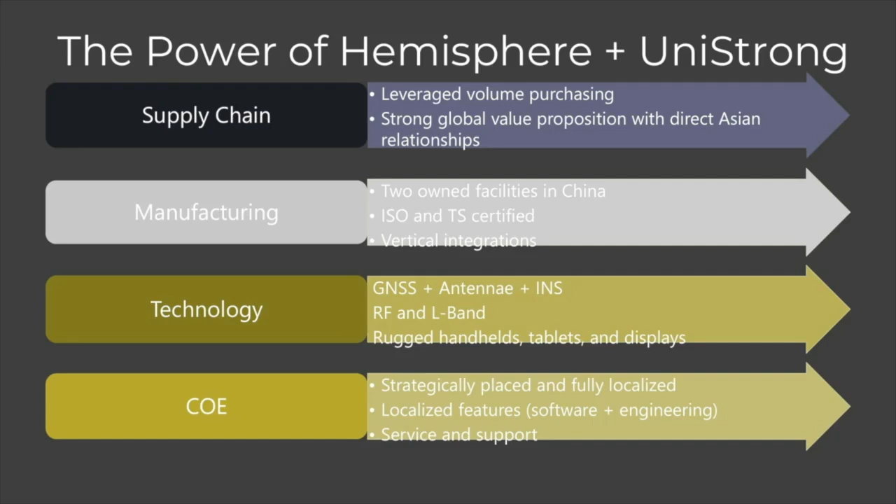Just touching a little bit on the power of Hemisphere and Unistrong. All of our products are developed in the US based on our very rigid quality standards, but at the same time, we have the production facilities located in China. We just recently opened a new contract manufacturing facility in Zhengzhou in cooperation with a company called Foxconn. All the development, design, and production, through to the finished good, is all in one hand, which is very seldom. We are only one of three companies. We cover the ASIC design, the GNSS algorithms, the antenna design, the software design, from start to the finished good. It's all in one hand, and we control the entire process.

So let's talk about GradeMetrix excavator site controlling guidance. GradeMetrix excavator is packed with industry-leading technology. It's very easy to use, as you will see later on, and is delivered at a very affordable price. The system can be installed and calibrated in less than 1 day, including all your buckets. From mini excavators all the way up to large civil or mining machinery, all are covered by either the mastless VR500 all-in-one antenna or the VR1000 dual antenna solution.

The GradeMetrix system fits straight into existing site infrastructure where you already have systems in place, with all the same formats and base station corrections. It also offers a best-in-class 3-year warranty on all expensive components for peace of mind. Increase efficiency, and your ROI could be as short as a matter of months. What we also have in mind is the 2.5D market. We want to enable customers to use GNSS at every site.

So this embedded function in Grademetrix allows you to use the GNSS guidance technology for a vast array of simple, useful applications here, without the need for complex 3D files from survey. Using just a couple of keystrokes, you can easily create simple layers, single or dual slopes, ramps, and even roads. And Ronald will show that in part of his presentation later on.

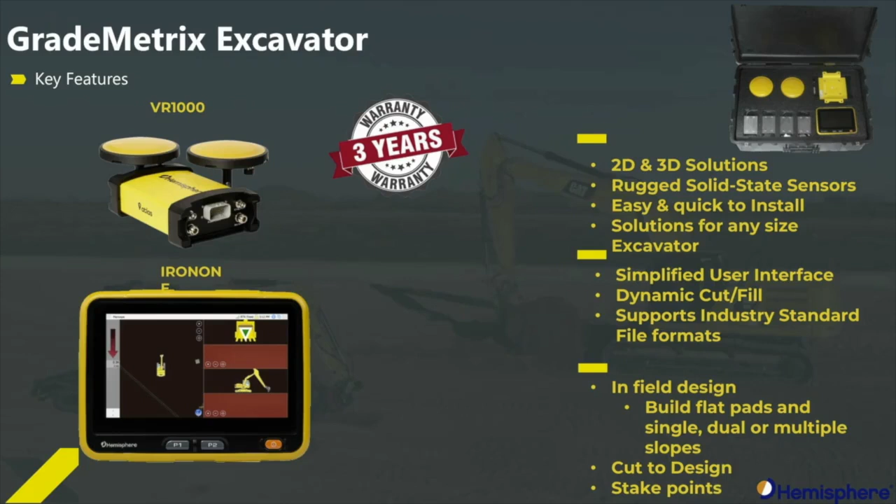What is embedded? We use probably the most modern RTK engine available in the market. Our latest multi-frequency multi-GNSS solution uses every available satellite in the sky as a standard feature and not as an option. It offers full satellite constellation for maximum accuracy and maximum coverage in difficult environments. Beidou, Galileo, and QZSS are all within our standard solution. Nothing to pay for, not just GPS and GLONASS. Therefore, it will reduce the downtime of your GNSS machine control fix significantly, and as a result, also expensive machine downtime.

Especially in difficult environments like open pit mines, where we will later show a case study, or in urban canyons, you will see a major difference if you have more satellites available. Also, using our own proprietary Atlas L-band signal, you will get the ARTK feature as a standard setup in your hardware configuration. So if you lose your RTK fix using a base station or NTRIP data, our Atlas L-band signal will help you keep the RTK accuracy for at least 10 to 15 minutes.

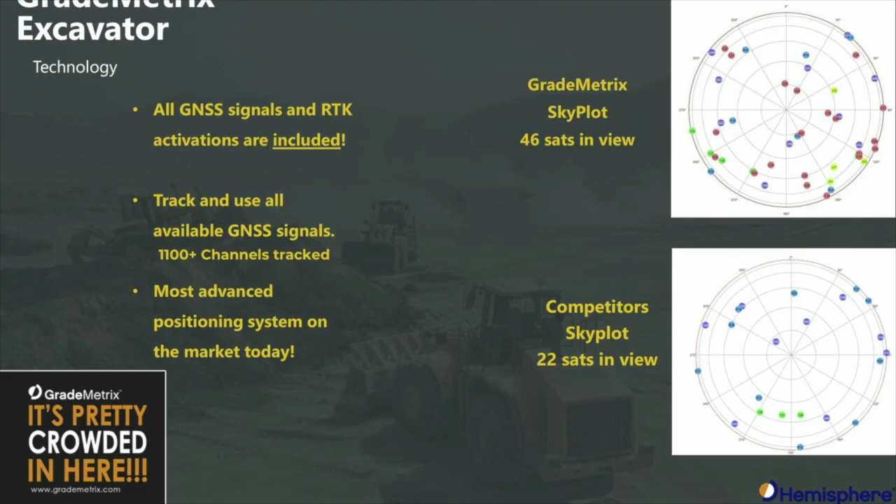So in order to help you plan your jobs, Hemisphere also offers a GNSS mission planning tool. Using the tool, you can enter your job site location, the time of day you want to work, and possible obstacles in your way. And as a result, you will see a detailed plan of satellites available. That is something you can find on our website.

So talking about the solutions that we offer on the machines. This excavator solution is powered by hardware components that have undergone extensive shock, vibration, and environmental testing to stand up to the harshest job site conditions. The solution that we offer for compact excavators comes with an IronOne PC, which you see on the bottom left, a VR500 vector antenna, and gyro-stabilized angle sensors.

So the Iron 1 is where the heartbeat of the system lives and all information comes together. It's embedded in a very ruggedized IP67 rated housing, featuring an 8-inch daylight visible touch user interface. It's made to withstand the harshest environmental conditions on a normal job site. The Iron 1 runs a Windows 10 operating system, and it offers full connectivity using Wi-Fi, Ethernet, and a GSM modem for worldwide usage. The combination of Windows 10 and an activated SIM data card inside the Iron 1 also allows your local distributor or Hemisphere support team to dial in to your system and offer online remote support and data transfer. As with all other major components of the system, it comes with a 3-year warranty.

The Vector VR500 is a unique and the world's only full dual GNSS positioning and heading device featuring one of the most modern RTK engine solutions. It embeds 2 antennas with a 50 centimeter baseline and an unrivaled heading accuracy of 0.2 degrees for this short baseline. To enable the simplest installation, a 400 megahertz radio modem and the UHF antenna are both built into the housing. It offers seamless connectivity with Ethernet, Wi-Fi, Bluetooth, CAN, serial, and a sophisticated web user interface.

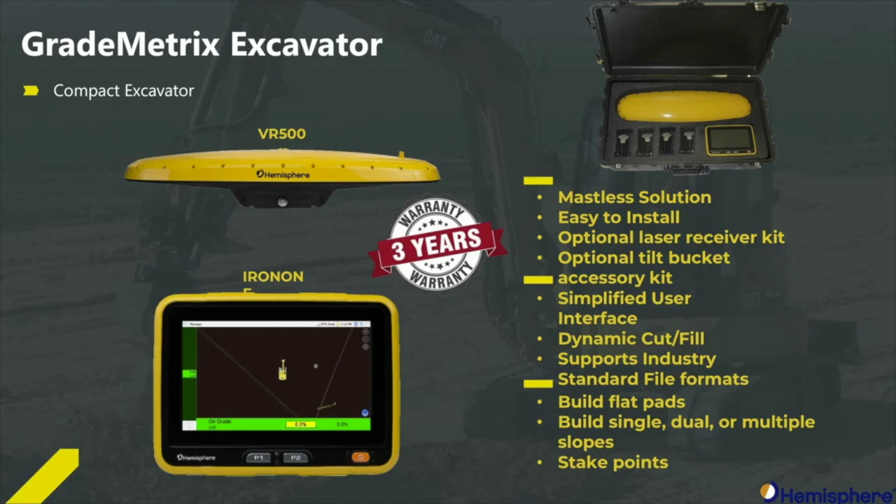The large excavator solution comes with an Iron 1 PC, a VR1000 heading receiver antenna, and gyro-stabilized angle sensors. The Vector VR1000 is one of the world's leading dual antenna GNSS position and heading receivers. It uses 2 A46 antennas. It features a heading accuracy of 0.1 degree at a 2-meter baseline on the back of your excavator. To enable simple installation, a 400 megahertz radio modem is built into the housing. It offers seamless connectivity with Ethernet, Wi-Fi, Bluetooth, CAN, serial, and a sophisticated web UI. The VR1000 was developed against the highest automotive standards, as we did that together with a big OEM as an OEM fit.

Plus, we had to comply to additional requirements. Each single axis of this unit is tested 32 hours for random vibration, followed by an aging section with temperatures raising and lowering between plus and minus 40 degrees Celsius. This is again followed by a 32-hour random vibration test.

You can basically install this unit anywhere in the machine engine compartment, steel on steel, with no need of vibration supportive material. Additionally, we use gyro-stabilized sensor technology, so you have no lag time in response, meaning highest accuracy and clear visibility for the operator, even on long-reach machines. Even if broken due to a working environment, we keep cost for wear and tear as low as they are off-the-shelf industry components.

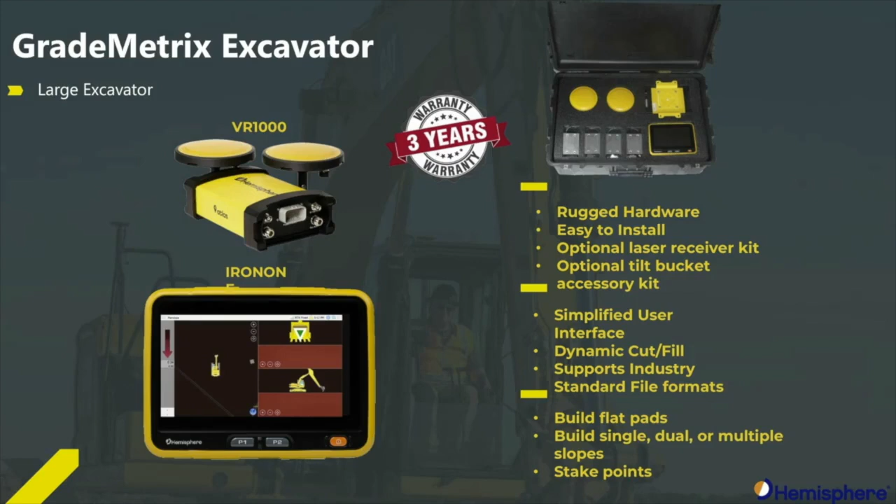Cost savings effective immediately. As we have seen before, this system technology is based on few components and 4 cables only. So you can already start saving cost before even using it. The installation time required by your distributor only takes half a day and the acquired equipment is easily interchanged between machine fleets.

Here is one example of why using Grademetrix on your excavator. Imagine a batter is overcut by 0.5 meter over 500 meter length. The overcut would total 2,500 cubic meters. Additional excavator time could be as much as 25 hours, plus 166 truckloads would be needed at 15 cubic meters per truck. So the total cost would be more than the cost of the guidance system to prevent it.

We used to hear from customer testimonials or advertising that the productivity technology for machines is providing customers with 20 to 40% plus productivity gains. Fuel consumption difference between the 2 methods, as an example, represents about 30% savings. Time is another part of your saving equation, as you will improve the time to finish a job at least by the same percentage. This is represented by less passes required to get on grade, and we shouldn't forget that the closer to final grade you are on earth-moving operations, the faster the time for grading will be.

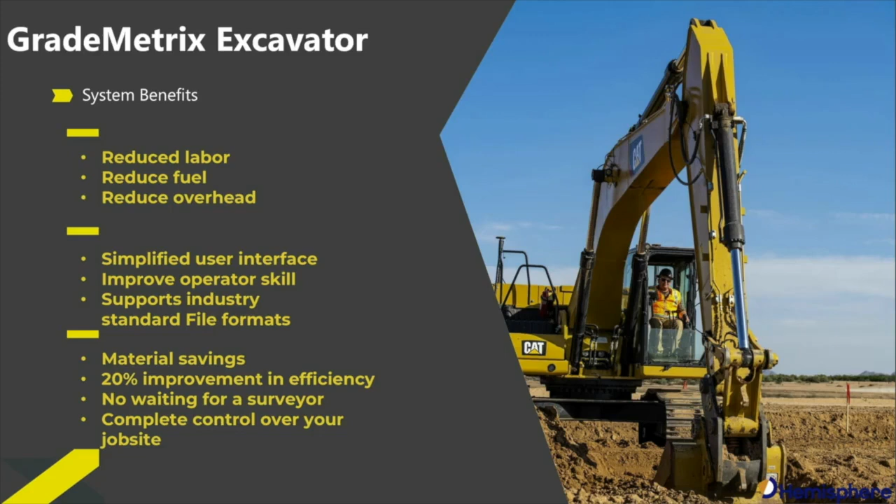So case study 1, which was given to us by a company called Red Rock in Australia, that's exactly what the image is about. We talk about how much there is to gain from utilizing high-precision GPS systems on machines in mining. In this case, we were fortunate to receive some great feedback on 2 Hemisphere high-precision digger systems fitted to some large mining excavators.

The shading in the wall that you can see at the bottom represents dig compliance. Green is good. So previously a site may revisit a section of batter 2 to 3 times to get it right, and not always successfully, leaving valuable product behind. In only 1 week and a single pass, they got it on the money. Outstanding effort from the operators, and good to receive such great feedback from our valued client.

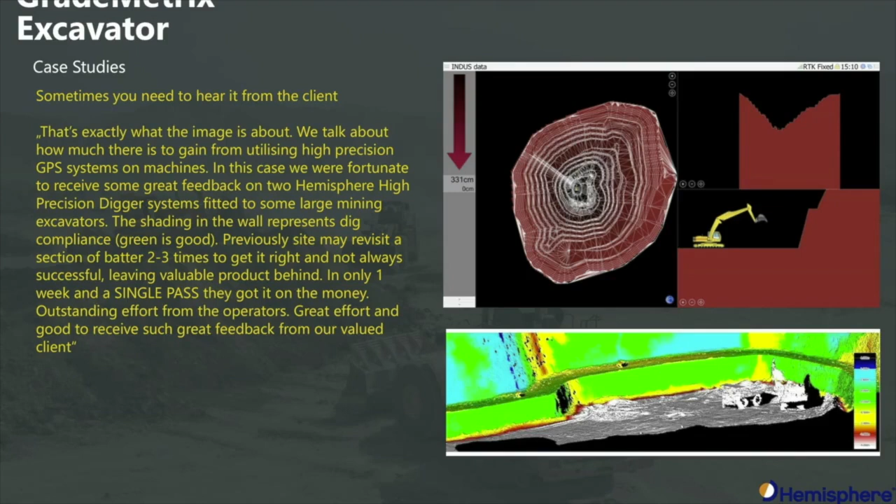So on the top of this screen, you can see the actual digital terrain model of that mine, and on the bottom, they made some checks afterwards on how good the excavation was done. And as you can see, and as mentioned in the text, it's right first time, no more expensive additional excavating is required.

The second one shows a case study which is more for a standard construction site. So this is about rainwater retention basins, and in the past, it seems that the job size played a very important role in the acceptance of guidance technologies. But what we want to achieve with the lower investment and price that we have is that customers basically can use it on a daily basis.

So in this particular case, the surveyor hasn't even staked out the basin, just only a couple of control points where the excavator driver could check the accuracy of his system, and the rest was simply designed by him and the 3D machine control system.

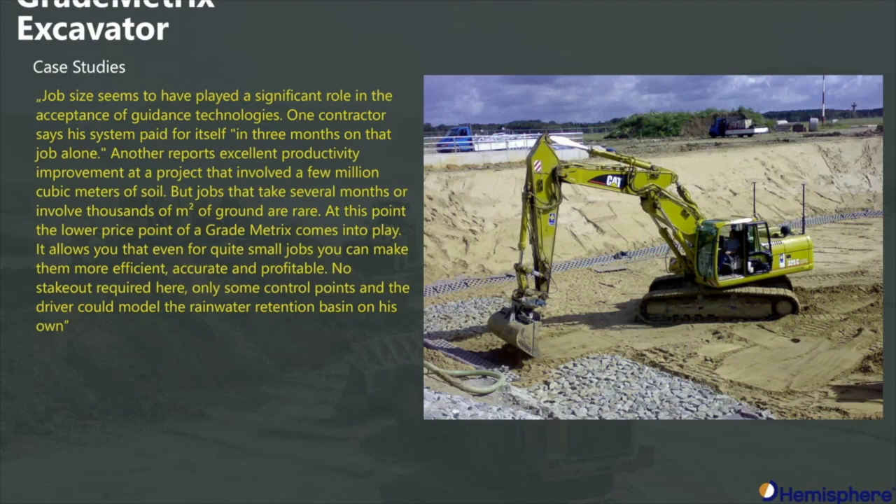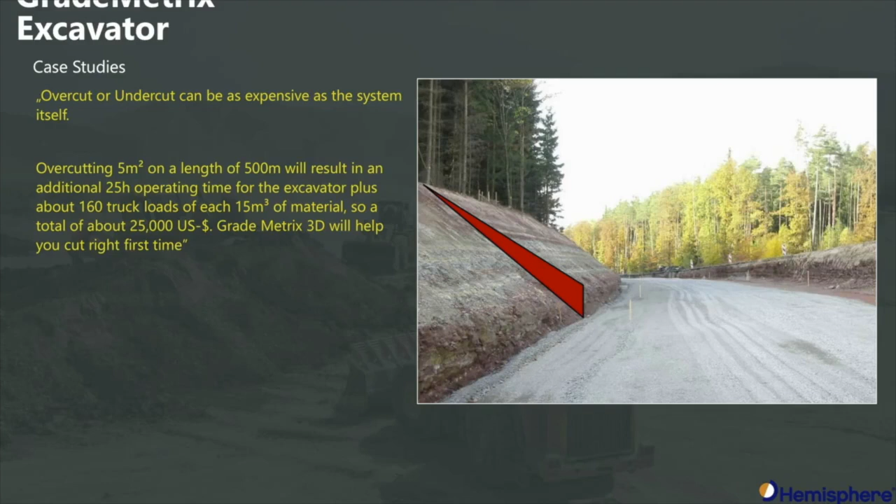And the last one, I mentioned that in the text before, shows how expensive an over or undercut can be. Again, as I said, just overcutting by 5 square meters on a length of 500 meters will result in extra cost of $25,000, which is almost the price of the entire system.

And now I will hand over to my colleague Ronald. He will share his screen and will run you through the presentation of the software.

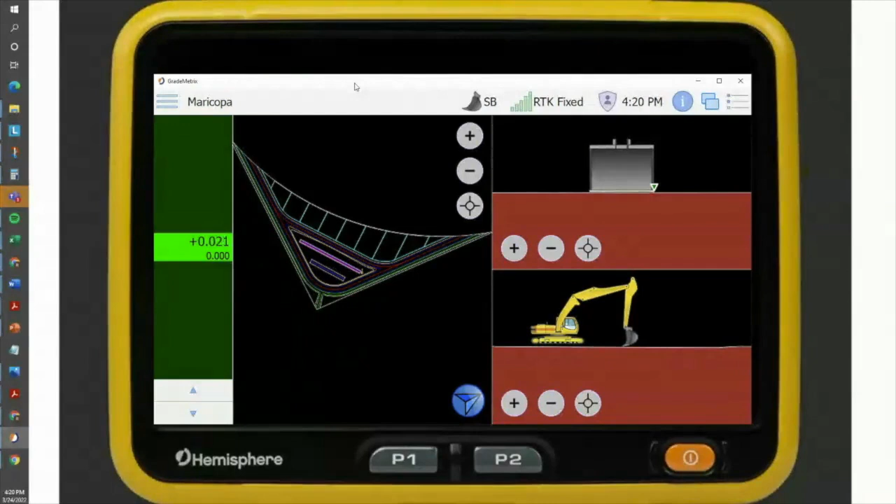So once the system has loaded the surface, line work, and localization, and the GNSS receiver has a fixed position, you're ready to start work. Currently, we support many ways the GradeMetrix can display cut and fill information, critical for grading operations. These different views are available in the upper right corner here.

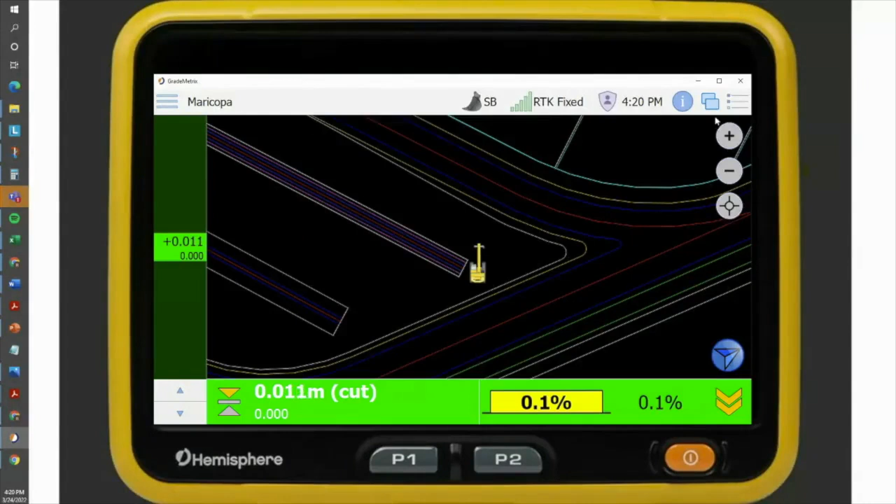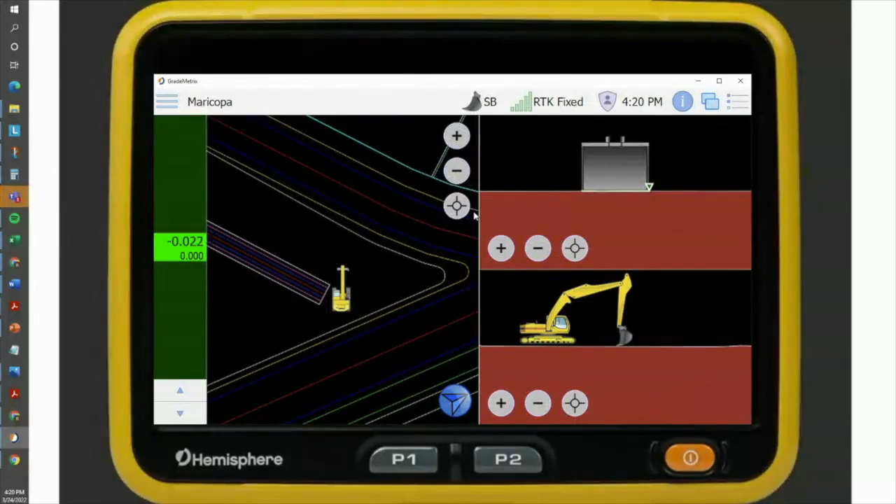Among these views, we have plan section cut and fill, big cut and fill, plan section and profile, plan and section, profile and section, plan only, section only, dual excavator. So I'm going to come back to plan section and profile, which in my opinion is the most common, the most useful one. This menu will allow the operator to select from this list of predefined views.

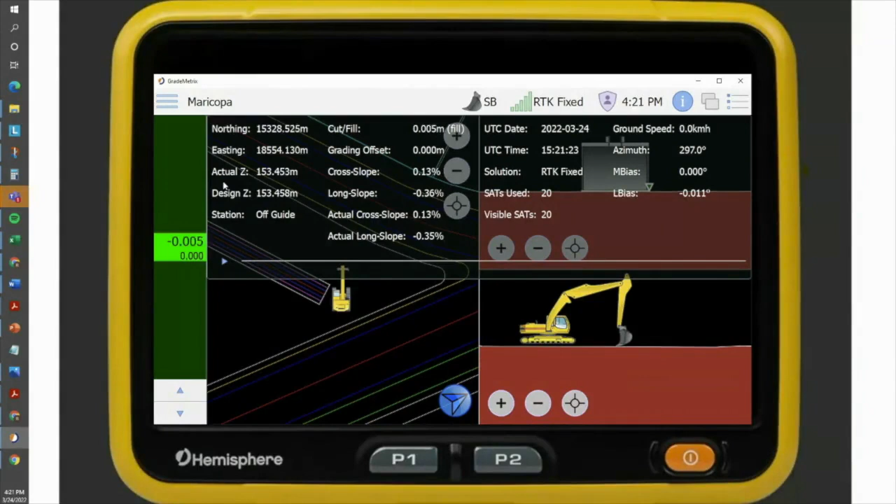So the section view shows the bucket as the operator is seated in the cab and seeing the bucket out of the front window. If the operator wants to see additional information, just click on the information icon, and it will display information related to the bucket and machine position. As you can see here, this north, east and elevation actually apply to the focus point or the control point of the bucket. In this case, the control point is indicated by this small triangle over here.

If you want to change the control point to the other side, you just need to press and hold over the bucket, and then you can change this to the left side or maybe to the center. I will change it to the left as an example. Okay, now the information here should have changed according to the change of the focus point.

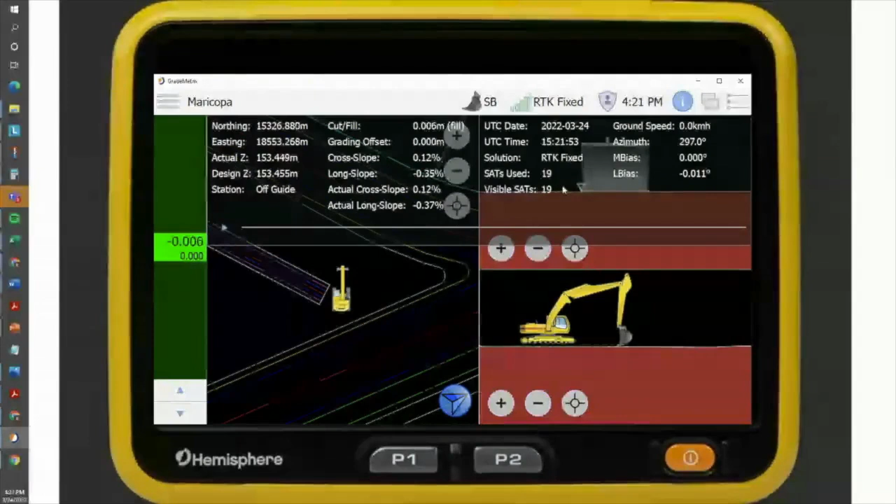All right, the information shown here can also be set to the user preferences. To change the information available in the information icon, you just need to open the menu, and then go to the gear. And here in the info summary is all the information available. You can tick or untick, to show just the information you are interested in.

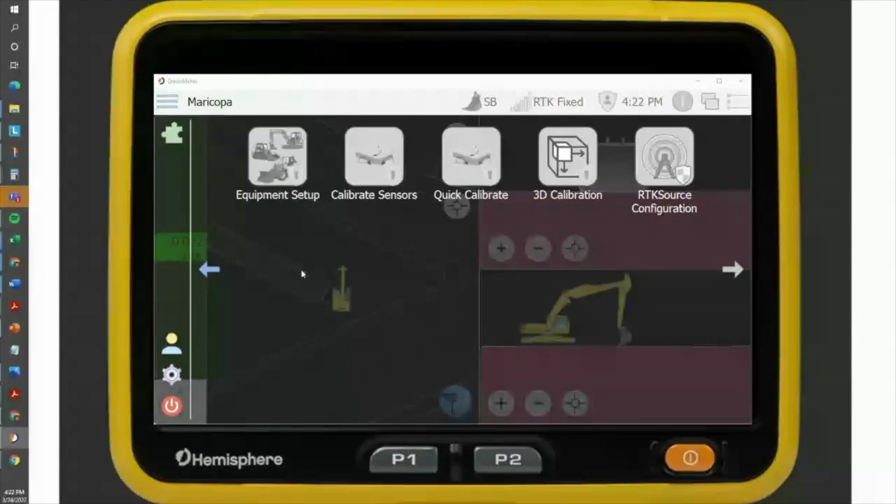Okay, there is another interesting thing here. As you can see, some of the options in the main menu are grayed out. So options related to opening new jobs, modifying jobs, deleting, and setup related to equipment setup, calibration, or articulators are grayed out and not accessible for users, just to protect information. If you want to have access to all the options, you just need to come here and change to administrator mode. Of course, the access to administrator mode can be protected by a password.

Okay, I'm going to get back to user. The GradeMetrix always starts in user mode when you start the system. Additional information can be found here in the grade and monitor view. Information available here is usually used for verification or diagnostic purposes. Among them, you have the VR1000 or the receiver information. In this case, it's a VR1000, but it could be a VR500.

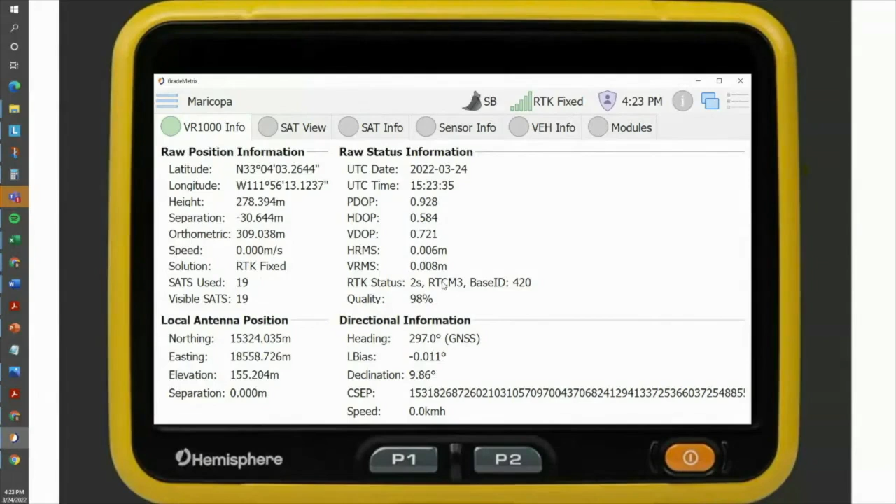So we have raw position information from the primary antenna of the system. We can also have information about the solution we are using: if we have RTK fixed, how many satellites we are using, how many satellites are visible, the RTK status, the messages being used, and the distance to the base station. Then we have the sky plot, satellite information, relevant sensor information, and vehicle information.

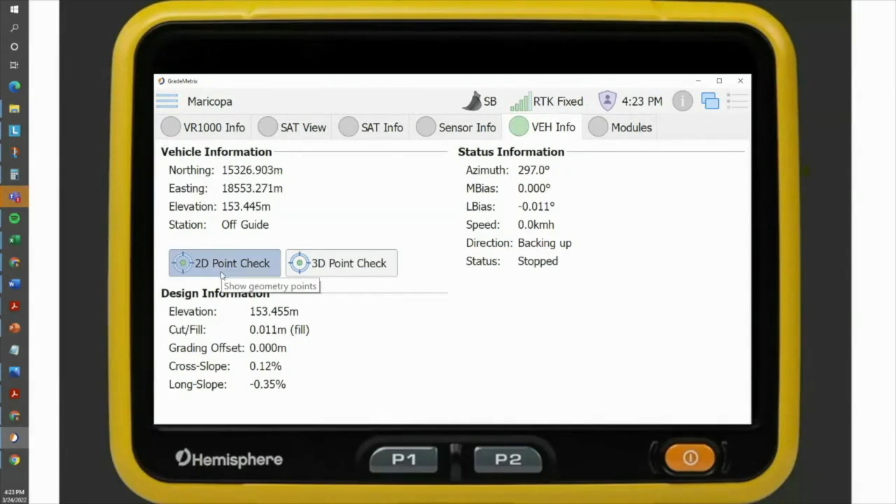Here again, we have the local position of the control point, the focus point of the bucket, and the surface exactly below it. We also have access to the 2D point check. These distances are the distances calculated by the system from the boom stick, for example, to the bucket pin or to the teeth. This is designed to check if your calibration in 2D is properly done.

Another thing available here is the 3D checkpoints. Here you have, again, the position of the right, left, and center teeth of the bucket. If you use a rover and measure the points, and the rover is connected to the same correction source as the machine, you can compare this measurement and ensure that your 3D calibration is correctly done.

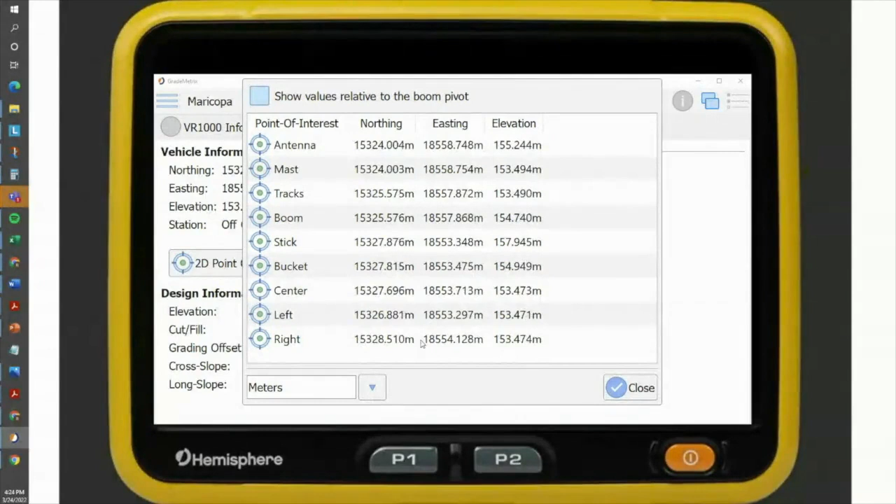All right, so let's move on. When a surface is created for a job, it's usually showing the finish grade, or the elevation of the last layer that job requires. The operator will have to adjust the offset, or offset the thickness of that layer, to get the proper cut/fill indication to a subgrade.

So Grademetrix can change the target elevation. This can be done using different methods. As you can see here, my bucket is touching the surface, and it's almost on grade. I can change my offset to a lower elevation, to a new target elevation, just pressing these arrows here. I can go down, I can go up. In this case, I'm lowering my target elevation by 10 centimeters, and this dotted line is showing my new target elevation.

Okay, I can also enter a specific amount of target by pressing and holding over the light bar, and this menu will pop up. Here I can enter a specific amount of offset. I will enter something like minus 0.6 meters. I can also save this new value in a preset, so I need to press and hold. I can also change how big I want the steps to be every time I press the arrows on the side. I will change it to 0.2, just for demonstration purposes.

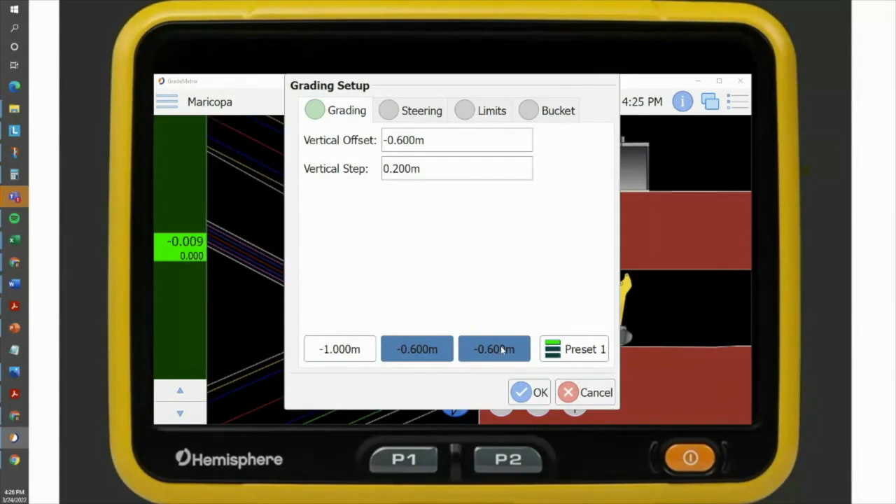Now, if I press 0.6, this amount of offset was applied. And you can see again that the red dotted line is displaying my new target elevation. Now on top of that, every time I press the up or down arrows, the amount of offset I'm applying is now 20 centimeters, not 10 anymore. Okay, so we discovered how we can adjust the offset and how to move the surface to a new target elevation to make space for new layers.

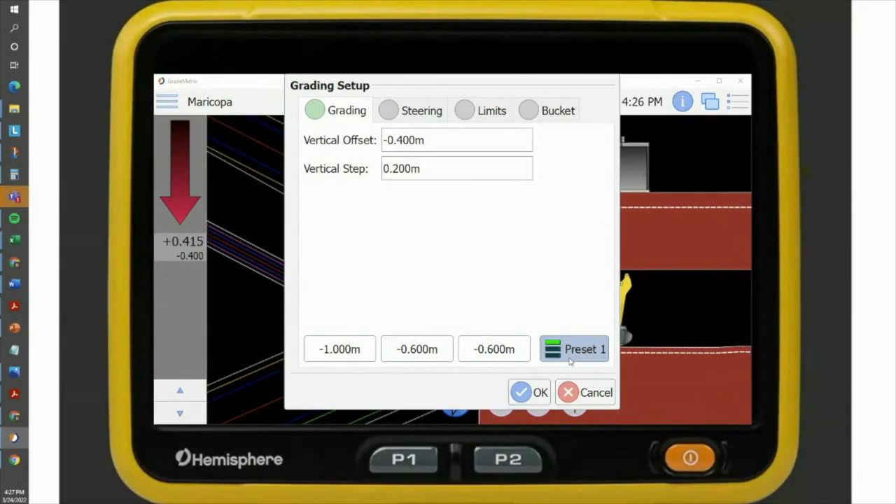This is another thing that I almost forgot: we can save up to 9 different presets, just for the speed of the operation. I'm going to keep my offset at 0 now. So now that we know how to use GradeMetrix for a previously loaded job, we will learn how to create a job. To create a new job, we need to come here. As you can see, the new job option is grayed out, so I need to change to administrator mode, and then I can start a new one.

The first thing the system is going to ask is to give a name to the job. I'm going to leave it as new job. We can also add a description to the new job, and we can also add notes. Then I will press next. The first file the system will ask for is the localization file. It could be a full localization file in a log format, or known points that we can shoot using a rover and do the localization on board. We can also use localization files from Trimble or Topcon.

In this case, I'm going to use the same project that you saw before, this Maricopa. I'm going to click over here and search for my Maricopa project. In this case it's saved in this design emulator. All this information is on my computer, but of course on a real job site it would be on the USB, and the new drive would be listed in this space. I'm going to open my Maricopa folder, and here I have my localization file, and I'm going to open this one.

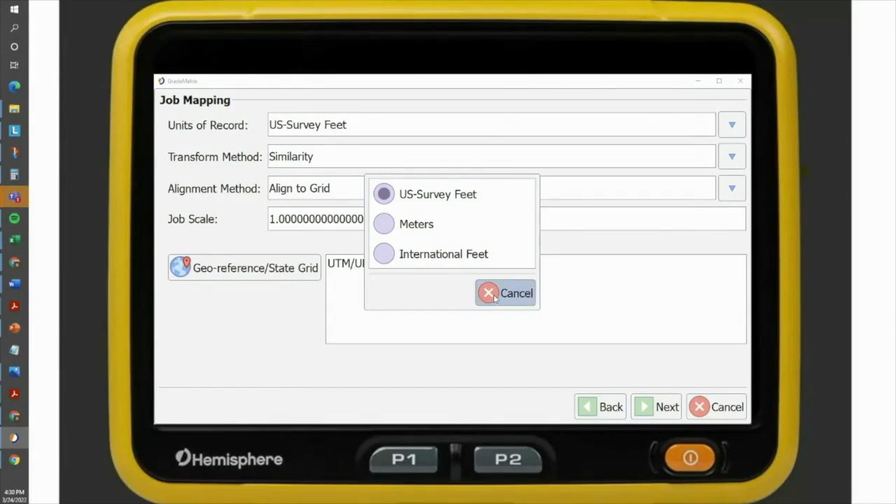Now, when I have this selected, I'm going to press next. So then there are the units of record. In this case, it could be in feet, it could be in meters. I'm going to keep it in feet, given that this project was made in the US and was made in this specific unit.

This is a place where you can select your coordinate systems. If you need to use a specific predefined projection, you have a list of them already loaded on GradeMetrix. If your specific projection for any reason is not listed here, you can always come to custom projection and load your own.

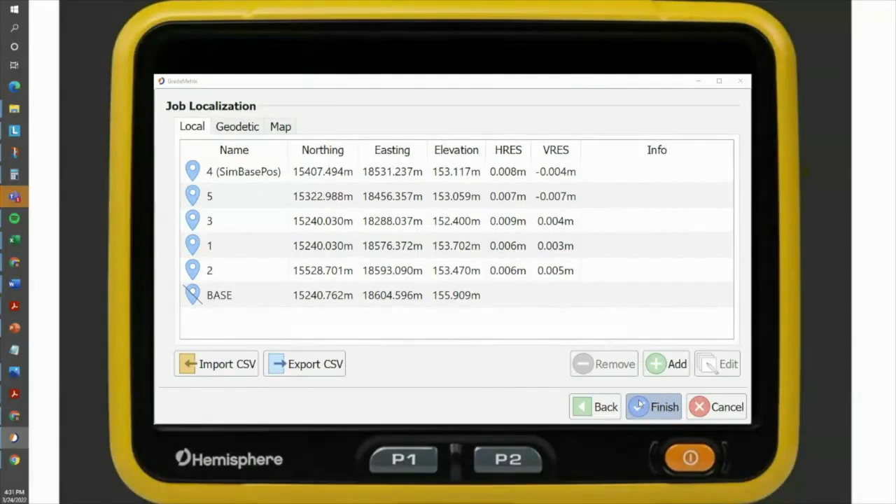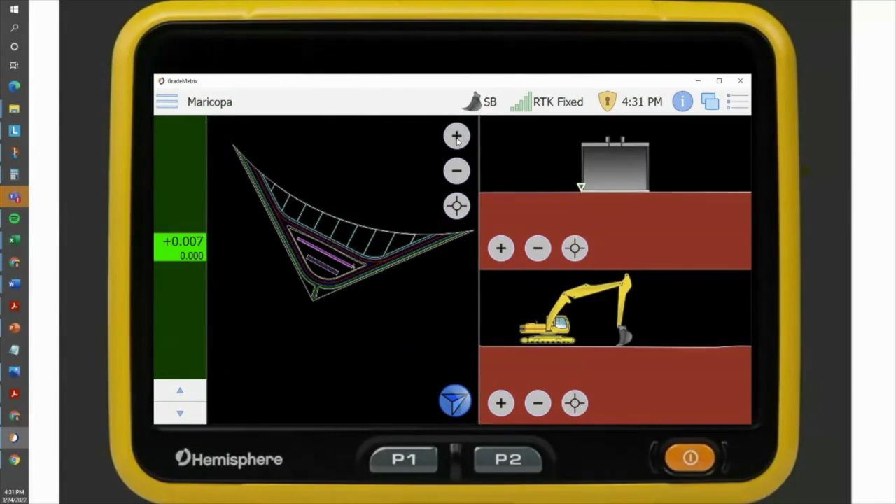Okay? Then you press next, and I'm going to have a list of the control points or localization points on this specific project that I selected and loaded. I'm not going to press finish now because I already have Maricopa loaded, and it's just going to consume time while it loads. So I'm going to cancel this one. But this is the project at the end; as you can see here, the name is the same. I can zoom out, zoom in, and if I press cursor, it will focus on me.

Okay, another thing on top of that: there will be cases where modifications need to be done to the specific job or an entire new project needs to be done on site. We have included tools for that purpose. We call it field design. Field design does not require a localization file, line work, or DTM. It just needs RTK fix.

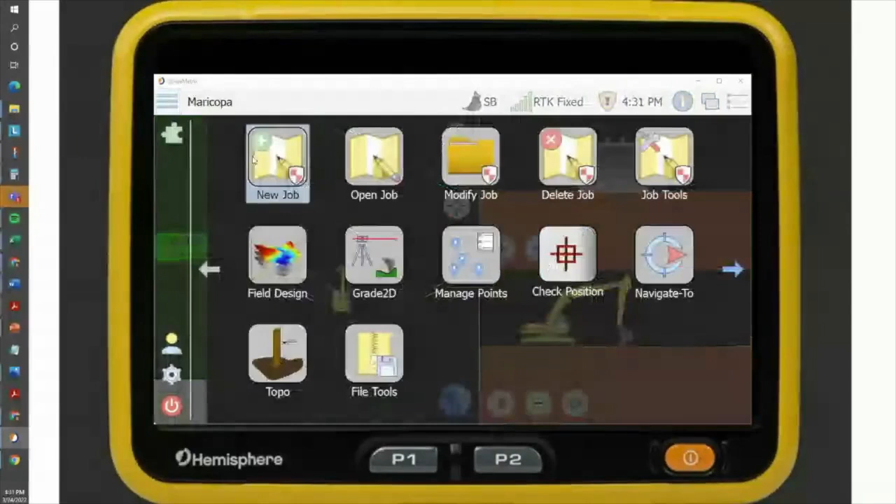For that, I'm going to start a new job, and I will keep it clean until the end. So I'm going to clean and not load anything. I'm going to start from scratch. So this is what we call 2.5D. In this case, you need to go to field design. And here we have 4 different options. We have flat pad, sloped pad, ramp, point surface, and an option to clear the last design that I made.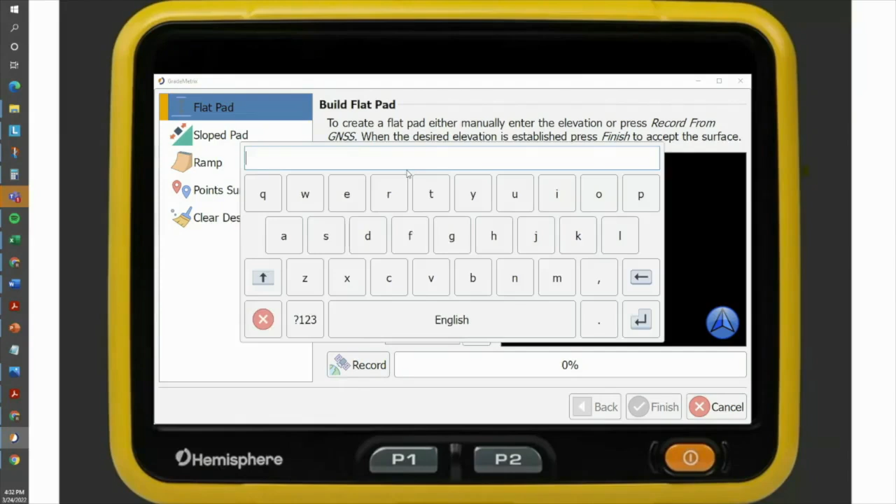To create a flat pad, I'm going to start with this most simple one. You just need to give the flat pad a name. I will call it flat 1. Then you need to place the bucket over the reference you're going to use to create that flat pad. And you need to indicate what side of the bucket you want to use, left, right, or center. I'm going to leave it in left for this. And you need to place the bucket in the right position and press record.

You can also edit the height or the elevation if you want. I'm going to change it to 100 meters. And press finish. As you can see, now I have a new surface created by this specific design that I just made. If I again adjust my offset, the offset is going to be applied to the same surface.

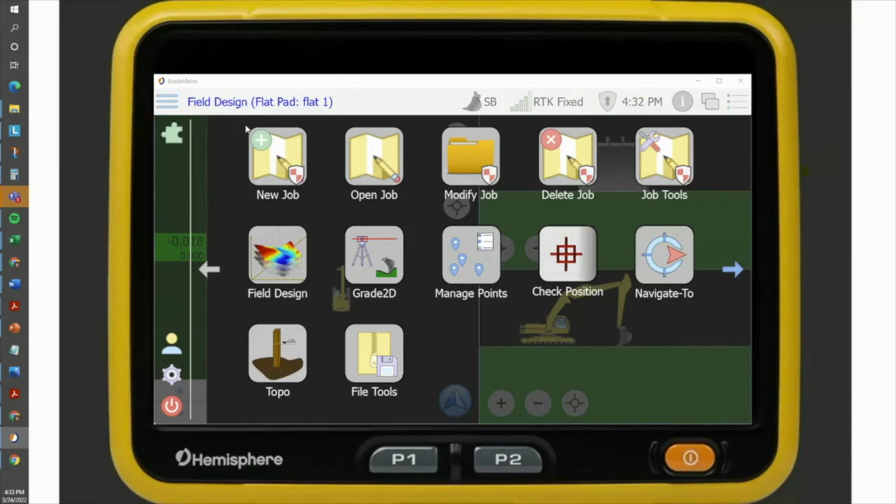Okay, let's move on to the next one. The first thing that I need to do is to clear the design that I've made. GradeMetrix is going to select the last one designed and ask me if I want to remove that one. I would say yes, I want to remove the flat pad. Now I'm going to create something a bit different, which is a sloped pad. In this case, again, I need to give a name. I'll call it sloped 1.

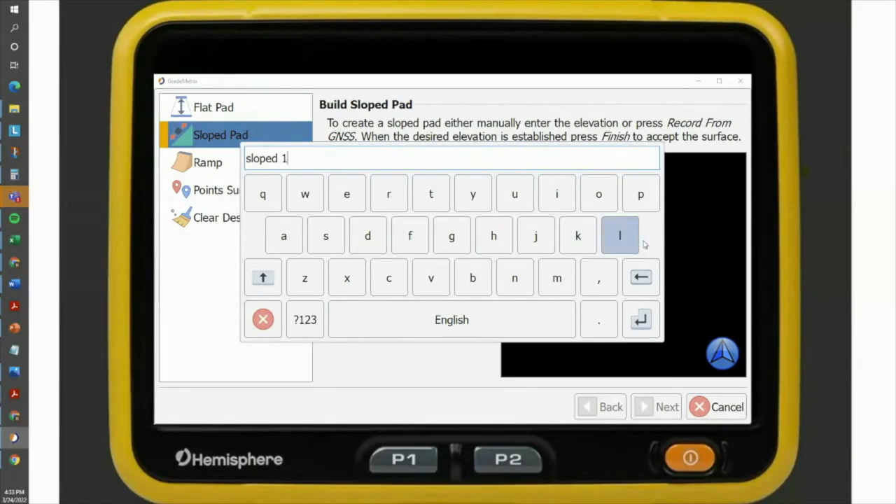And press next. Now I have to position the vehicle and the bucket again on the first reference I want to use to create the sloped pad, and press record. I can manually enter the north, east, and elevation in case I want to. I want to change this to 100, just for demo purposes again, and press next. Now I need to position the vehicle at the second point and measure that position. I move the machine, place the bucket over the second reference, and press record.

I can manually adjust the bearing, the distance, and the slope. I'm going to change the bearing to 100 degrees. The distance is going to be 80 meters long. And the slope, I'm going to fix it at 10%.

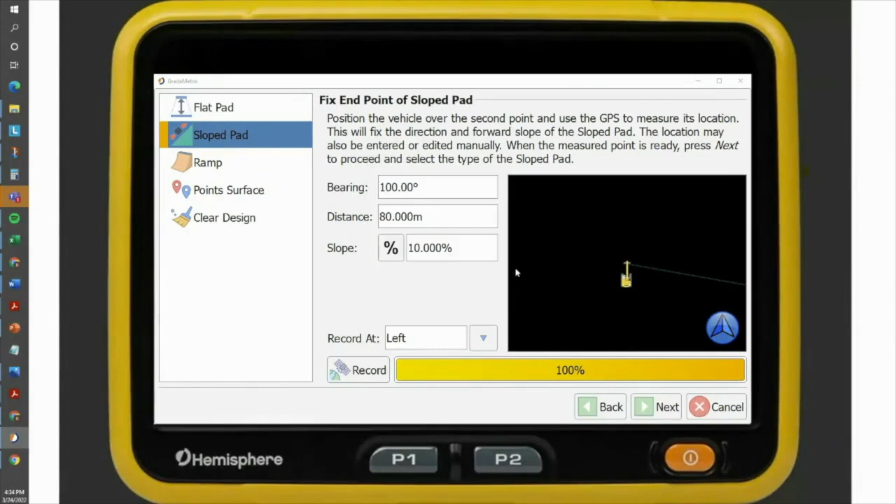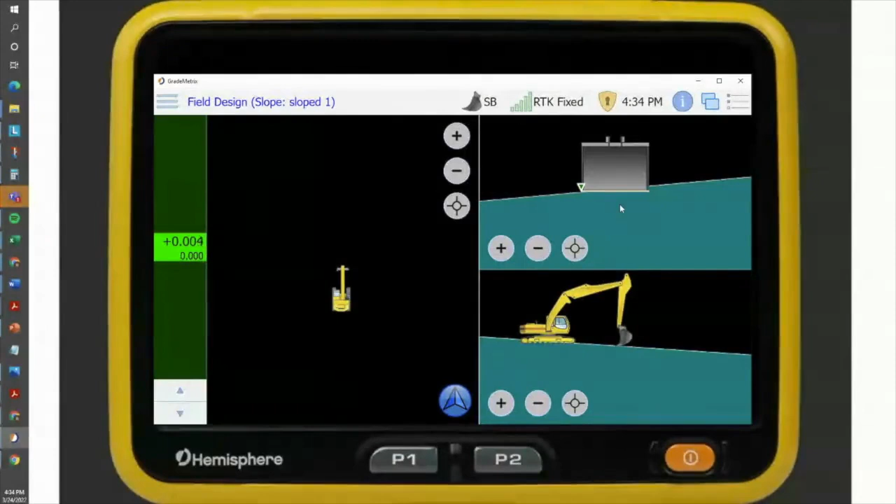Okay, and press next. Now I have the option to create an infinite sloped pad on each side of it, or I can give that sloped pad a specific width. In this case, I'm going to give a width at the center of 20 meters and a cross slope of 5%. And finish. And this is the result. I now have my sloped pad created. Okay, next I'm going to clean this design.

And I'm going to create a ramp. A ramp allows you to create a little more complex design, including main slope, length of the ramp, and the ramp profile creation. As an example, I will create something similar to a piece of road. First, I need to give a name again. I will call it ramp 1.

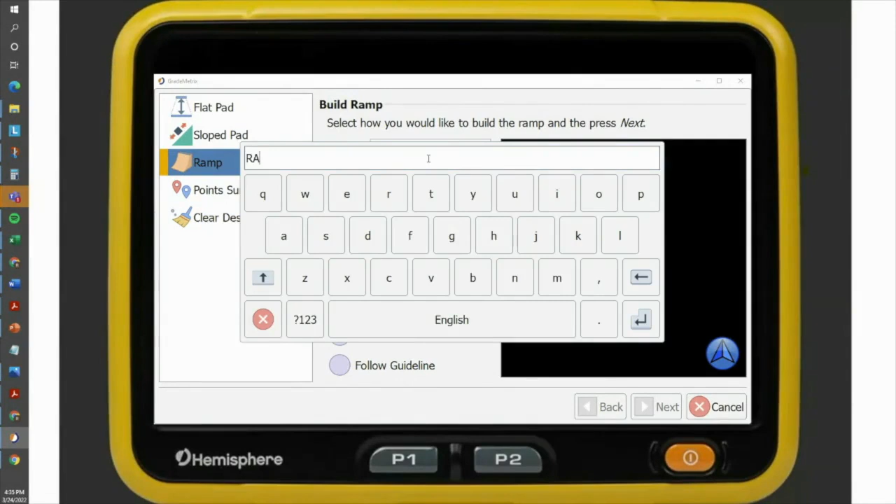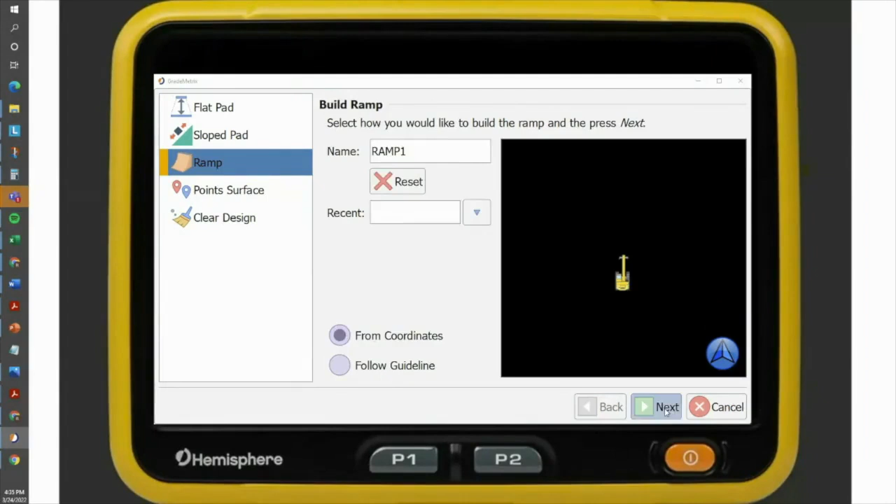In this case, I'm going to go from coordinates. Okay, again, I need to position the vehicle over the first reference that I want to use. Select what point of the bucket I want to use to measure that. I will give it left and press record. And next, now I have to fix the ramp direction and forward slope. Again, I move to the second position and repeat the process, hitting record again.

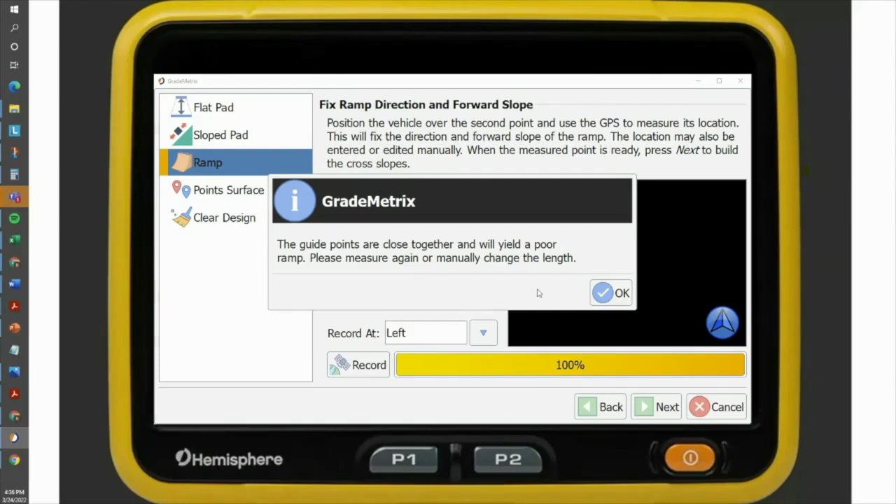It's telling me that my point is too close because, given that this is an emulator, I cannot move the machine while emulating in this space, so I'm going to enter some values manually. I'm going to leave the bearing as it is at the moment. I'm going to change the distance to 100 meters, and the main slope is going to be 5 degrees. Now it's time to create the profile of that ramp.

So the profile is built just by adding pieces of that profile to each side of the center line, which is indicated here. I can add a piece to the left, to the right, or both sides at the same time. In this case, to save time, I will go to both. The line width is going to be 5 meters to each side, and the cross slope is going to be minus 5%. And I will add these values to my ramp.

Now, I want to make like a curb on each side of this. So I'm going to try something a little bit different. The line width in this case is going to be 0, because I don't want any lateral displacement. I just want to go up a certain amount. I have different options: I have run and rise, I have rise and run, and I have delta elevation. I'm going to change this to delta elevation. I want to go up by 0.3 feet. And I'm going to add this. And here is my curb.

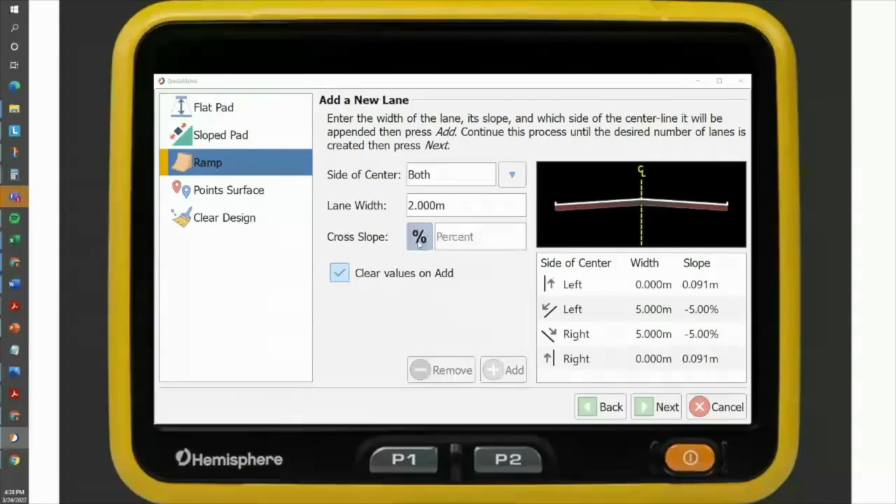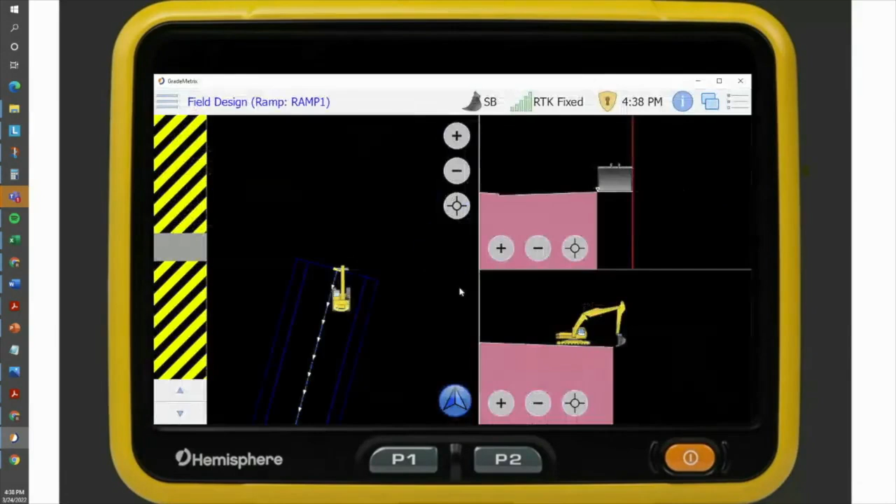Now I want to add the sidewalks. The line width is going to be 2, and I'm going to change this, just for demo purposes, to run and rise. In this case, I'm going to run 2 and rise 0.1. And I will add this. And here we are. If I press next, I have a plan view and a cross-section view of how this is going to look. If I press finish, now I have the ramp that I have created.

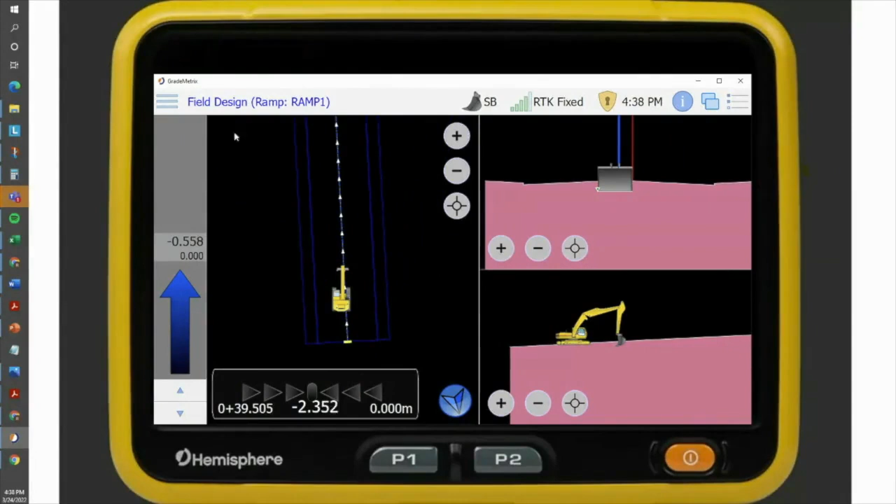Here I have my section view, my plan view, and also the system is giving me some guide to the center line, as you can see here. It also provides some kind of visual aid to allow me to follow the axis of that. Okay, the next and final, first I need to clear the design. I'm going to remove the ramp.

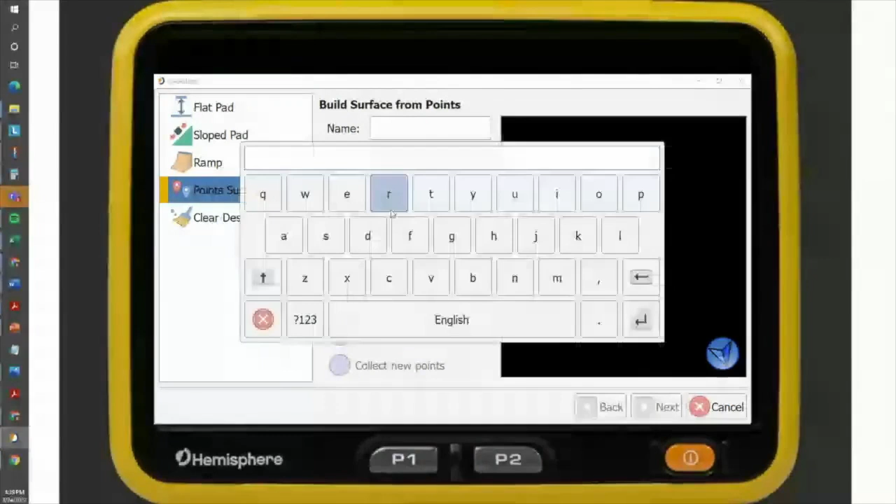And the last and final option for field design is to create a surface out of points. In this case, I think I have some points already saved in this folder, so I'm going to just give a name, and I will call it from topo. Okay, and I will press next. Now, I'm going to search for my topo files. I have some points already saved here. This is the file, the points I have created.

Oh, let me check something first. Sorry for this. Yeah, it's fine.

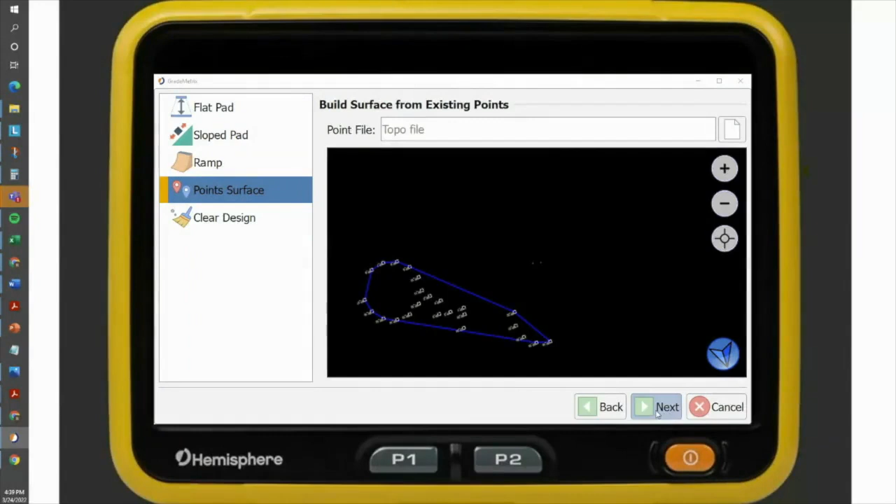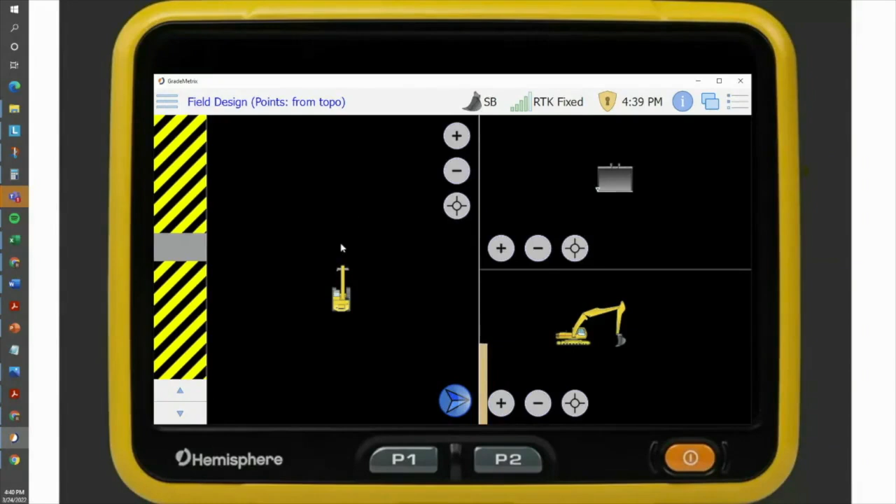I'm going to press next, and this is how it looks. These are just some random points that I recorded in a previous exercise. And I will press finish. If I turn the machine, usually it takes just a moment to load this. And here we are. It's not visible here because there is no line work in this design. So to make this visible, I just need to go to the main menu, click on the gear again, go into surfaces and show this as design.

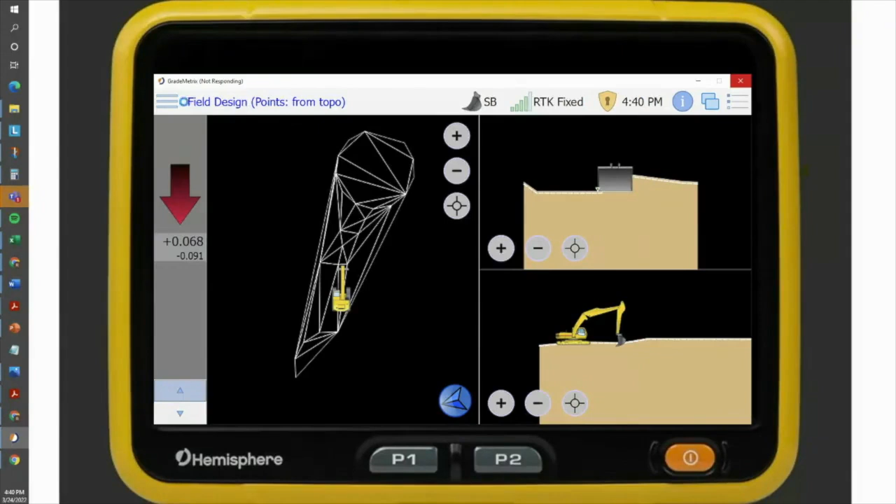And here we are. This is the design. As I say, don't pay too much attention to the design of it. It's just some random points that I have saved. Okay? And here we are. Again, if I apply the offset, it's going to be applied to the new surface. Okay, I'm going to clean this. Oops. So here we are. I'm going to clear the design.

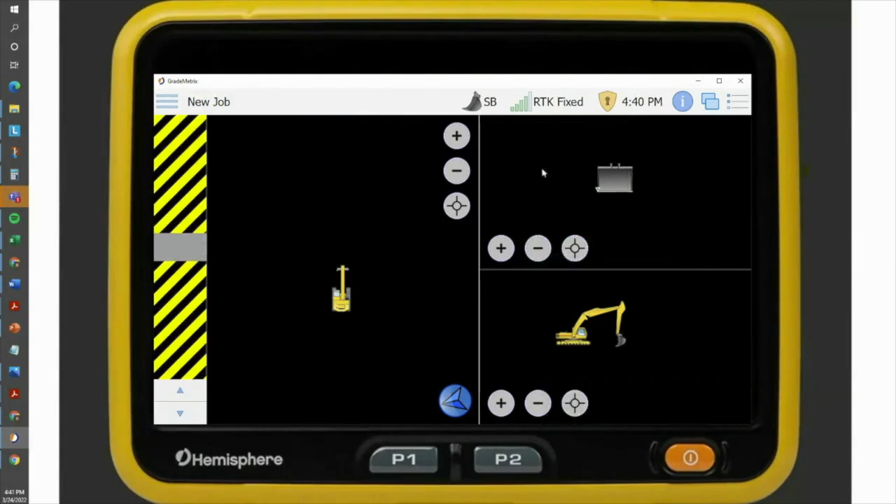Just a moment, please, until this gets back to work. Now I'm going to open again. Oh, there is another option, which is called the Grade 2D. This will work exactly as any other 2D systems on the market. We can use laser as a reference as well, and we have several options here as well.

So the 2D offers me 5 different ways to work. We can create a flat pad, single sloped pad, dual sloped pad, a trench and a profile. Given that this is very similar to what we have seen in the field design, I'm not going to spend time on this, just to show you how it works. You don't need to keep going until the end. And I have something that I previously created, and this is a trench that I have created before. Okay? Just some other options to work in a full 2D, and in this case, you can also use a laser as your reference.

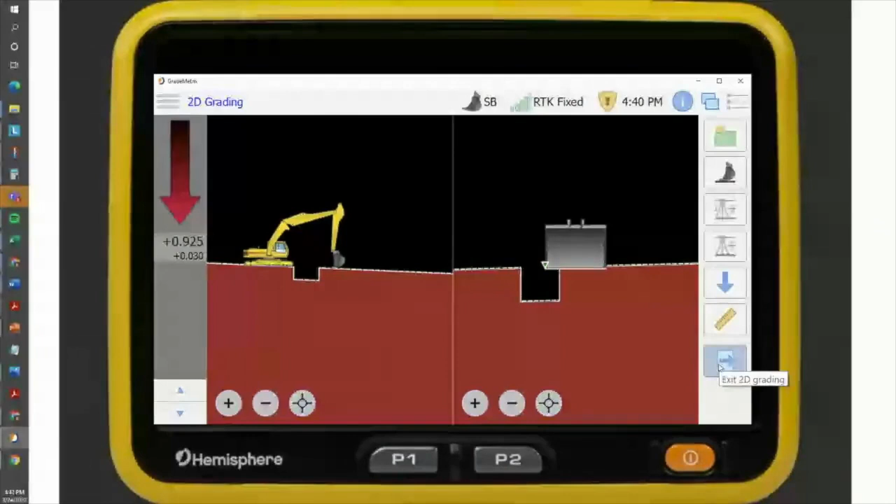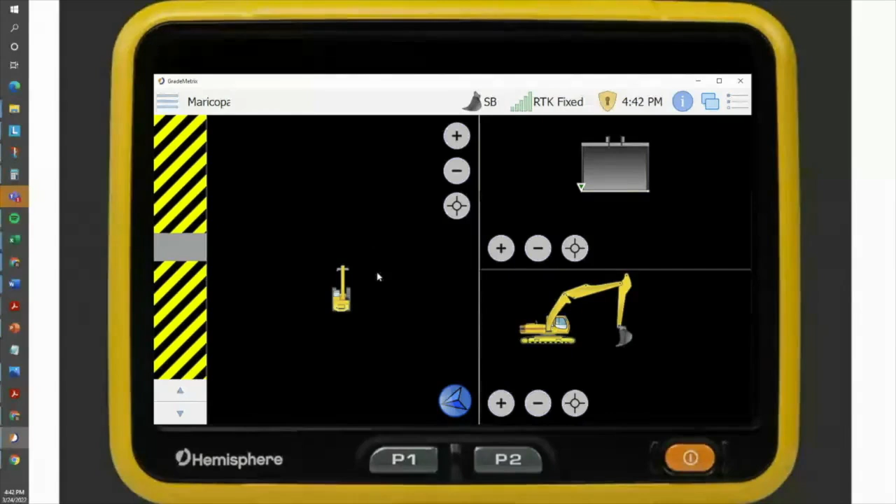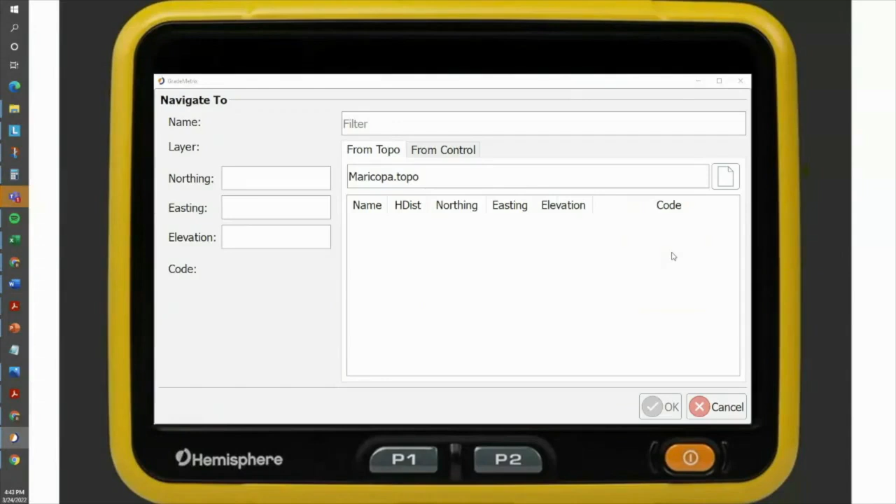So I'm going to move my machine back. As you can see, there is one point here. One of the control points is located close to the machine. So I have two interesting features as well, which are navigate to and check position. If I want to go and navigate to a single point, in this case, in Maricopa, I don't have topo points, but I have control points.

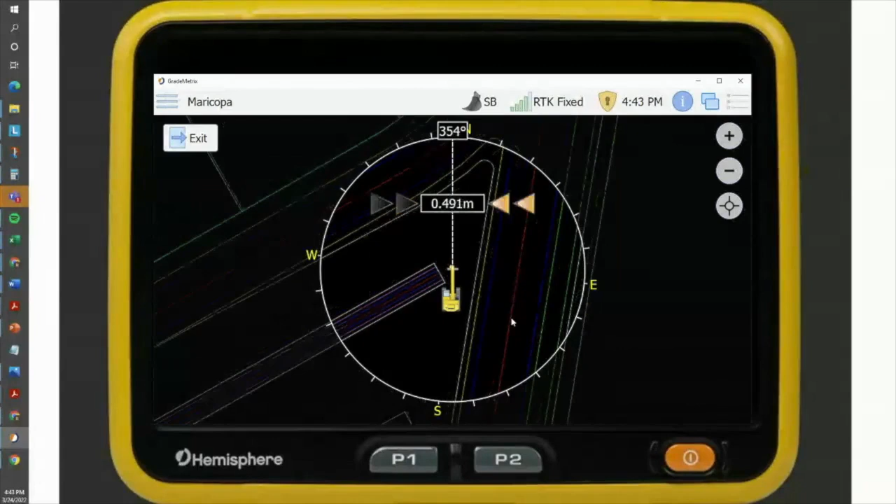I'm going to select this one, press OK, and the system will tell me in what direction I need to steer and where I need to go to place the bucket over the control point that I want. In this case, it's going to be approximately there. When I'm on the place, I can exit. Now I can check the position on that specific point. So in this case, I'm going to select the point that I know that I'm over. I can select which side of the bucket I want to use to check, and I'm going to press check.

The system will compare the position of the bucket with the reference that I got, and it will tell me the measured offsets to the position, and the residuals as well.

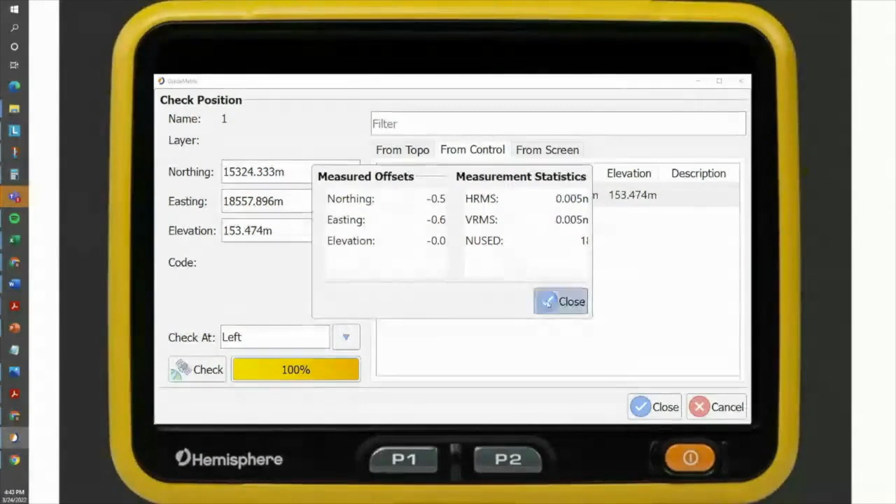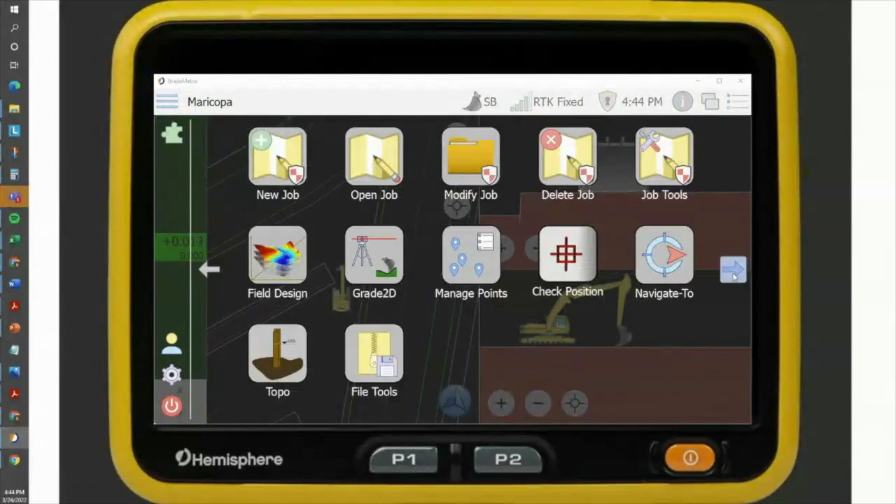Okay. So the last thing that I want to cover is some of the RTK options we have available in GradeMetrix. GradeMetrix offers the chance to work with RTK over NTRIP or over radio. You need to come to the main menu. I will show that again. Go to the main menu, move to the right, and we have RTK source configuration here. So we can use a UHF radio. It could be the internal one on the VR1000 or VR500, or external. If you select the internal radio, the system will give you the chance to set up your frequency channels and the bandwidth. Then you can select also the protocol you want to use.

And is the FEC going to be on and off? If you have to use an external radio, the only thing that you need to set up on GradeMetrix is the baud rate or the speed of the connection, because all the rest is going to be set up on the radio itself. And the last one is NTRIP. For NTRIP, or RTK over Internet, GradeMetrix can access NTRIP casters using an internal NTRIP client and a GSM integrated modem.

The display has a SIM slot for that. Just enter the right caster details and you're ready to go. And as an option, multiple casters can be edited and saved. The GSM modem also allows remote access to the display using TeamViewer or remote support, as this works in Windows.

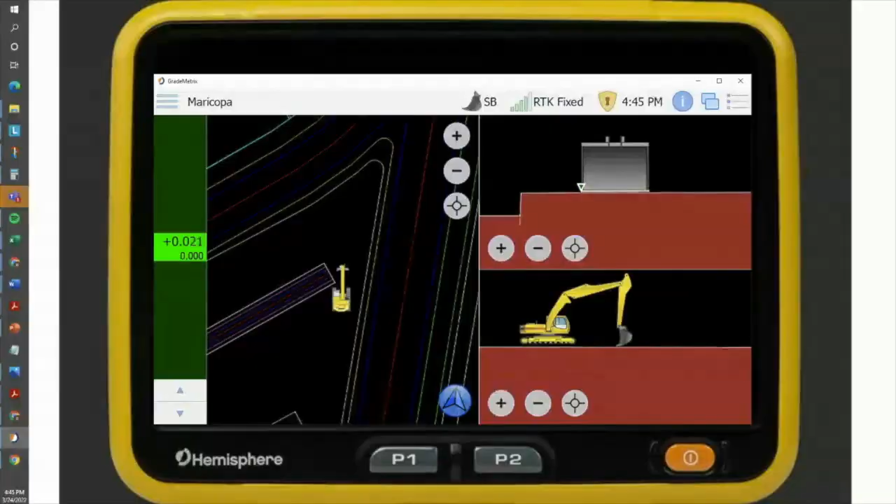So back to the presentation that we had. So just a quick summary. What we offer here is what we call performance, simplicity, and value. Our solution offers an unprecedented value in machine guidance, pairing the lowest available system price on the market with highest available precision and performance together with a market-leading 3-year warranty. So precision and reliability at an affordable price.

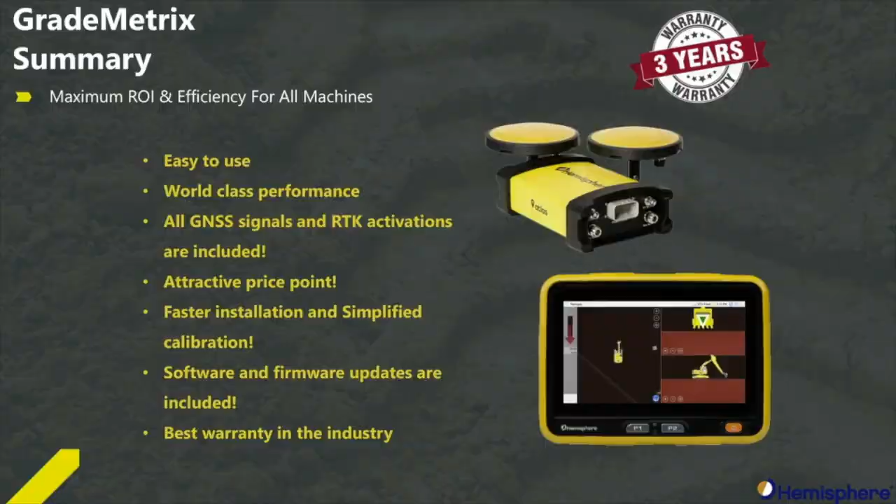So I want to just briefly touch what we call SiteMetrix, which is an additional part of our machine control solutions. SiteMetrix basically is a software that is like a universal construction site supervisor system. It includes our C631 RTK base and rover, so you can use it as a base system, or as a base and a rover, and it's a tool to help you manage all of your job site activities. It was designed to be user-friendly because it's basically the same background and the same format as the GradeMetrix system on the machine. It's easy to understand, portable and extendable.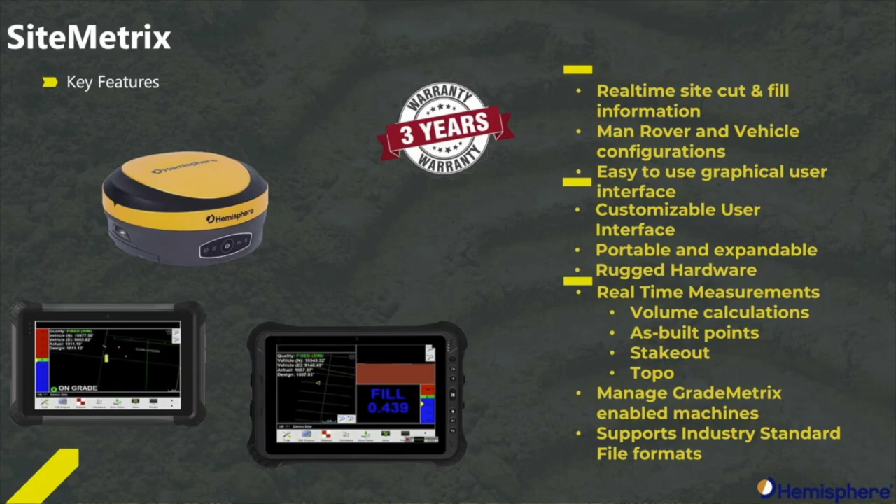So job site supervisors can get daily, weekly, or anytime volumes, track real-time results of cut and fill, plus they can collect stake points. So using the system to localize sites, check grade, configure base stations, set up your own stakes if you don't want to wait for a surveyor, and calculate volumes of materials removed. Depending on the business dynamics that you have, your return on investment could be as short as a matter of months. It fits straight into any existing site infrastructure with all the same formats and base station corrections.

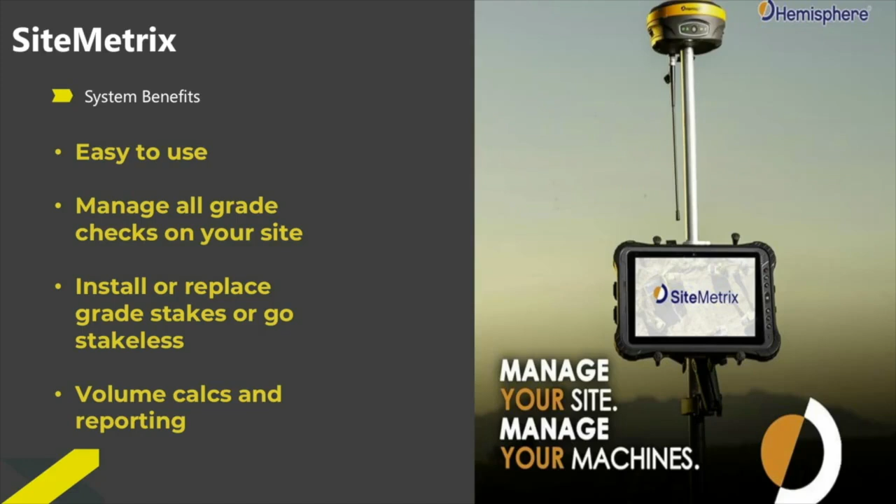And you take control of your projects, improve your efficiency to get your jobs done a little bit faster. So you have control over your entire job and are not always dependent on your surveyor. You can do it yourself and save time, fuel, labor and cost with the ability to have a management system in the hands of your own site foreman.

What is quite important here, and Ronald did not really fully touch it in his presentation, is the installation and calibration process, especially for the distributors that we have in our audience; it's quite a unique way. A trained engineer can install the system in between 4 to 6 hours, including the calibration. What we have in the SiteMetrix system is a way that for your 3D calibration of the position of the antennas, we are not measuring them as other players in the market are doing, and we don't need a robotic total station for measuring the machine.

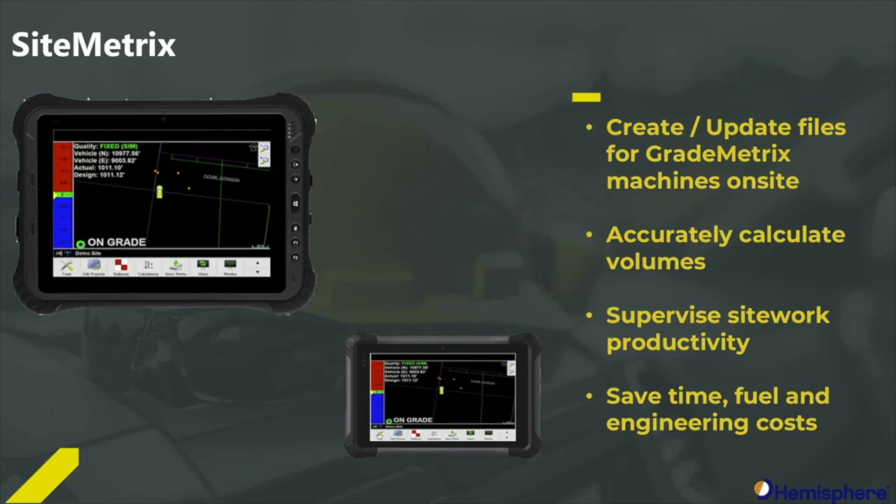What we do is we have designed 6 points around the machine, which we go to with our rover and the SiteMetrix system, stake out those points, and then import that file via USB stick to the GradeMetrix system, and that will give you your full 3D calibration. So as with the system itself, we also want to make installation and calibration as easy as possible.

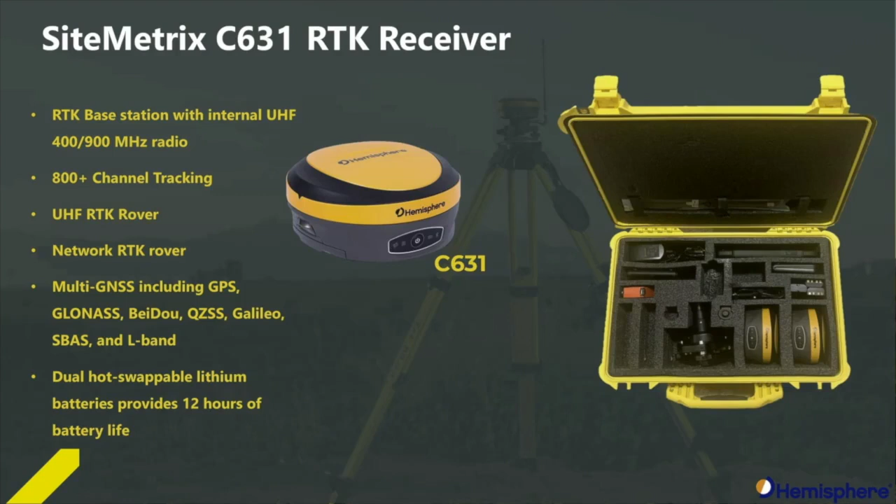Of course, what is also important with the C631, it also has, like our S631, the tilt function included. So you can use it for tilted points and anything else you need for a GPS rover. Very easily swappable between base and rover solution. Best case scenario, the job site supervisor will get a full kit with 2 units in place so that they can really use it for all kinds of applications that they have.

And now I want to show you at the end of the presentation a couple of the options that we also offer. And for that, I need to share my screen because it's 3 very small videos.

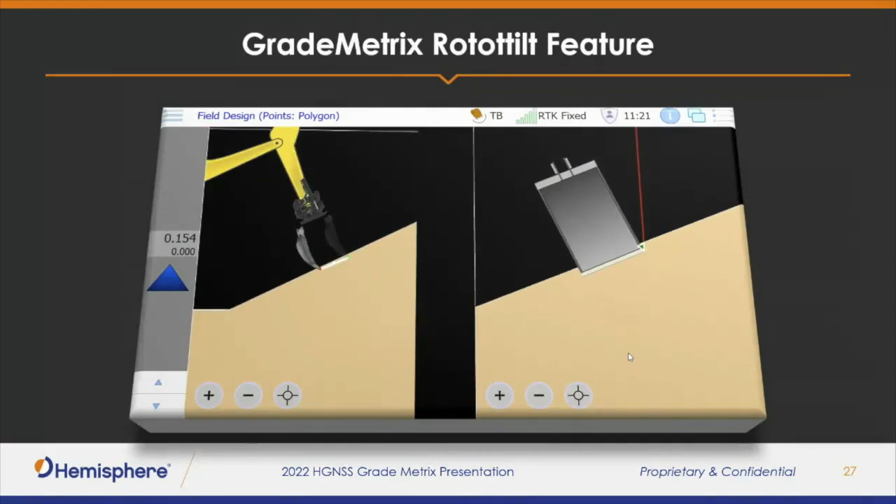So hopefully everybody can see that. So what we have on the run now is the rototilt option. So we are just about to test that and then release it to the market, which is not very common in all countries in the world, but in some countries it's becoming more and more popular. So we have the rototilt function.

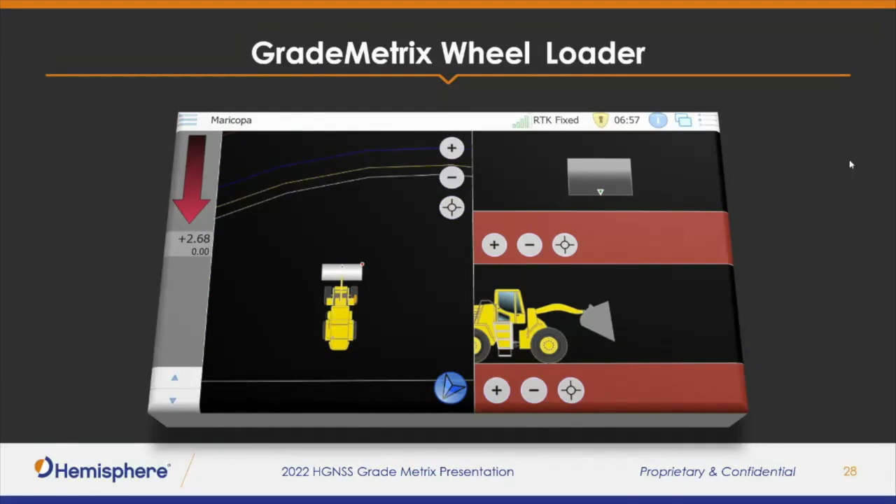In order to cover, let's say, the whole stream of the job site, we also offer it as a solution for wheel loaders. So in many countries we see that the wheel loaders are used for finish grade instead of a motor grader. So we have an application there. And last but not least, and sometimes maybe also applicable for agriculture, we have the skid steer solution ready in the next release.